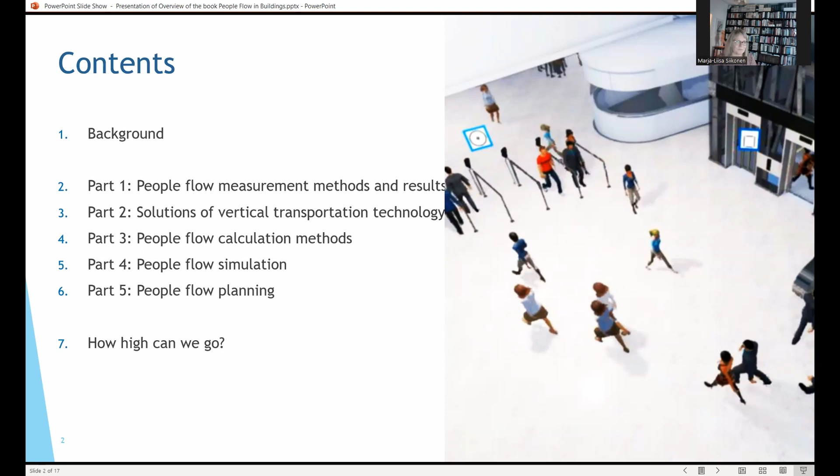In 1970s, 80s, Barney dos Santos published the book of Elevator Traffic Analysis, Design and Control. It is the fundamental work in elevator traffic and has inspired me in my research work throughout the years. Later, when planning customer projects, Vertical Transportation by Strakosch has given a practical insight to the elevator planning. I have experienced the changeover from the relay controls to software-based systems from 1980s up to now. Also, elevator planning methods have developed during these years. This is all I wanted to write down to this new book.

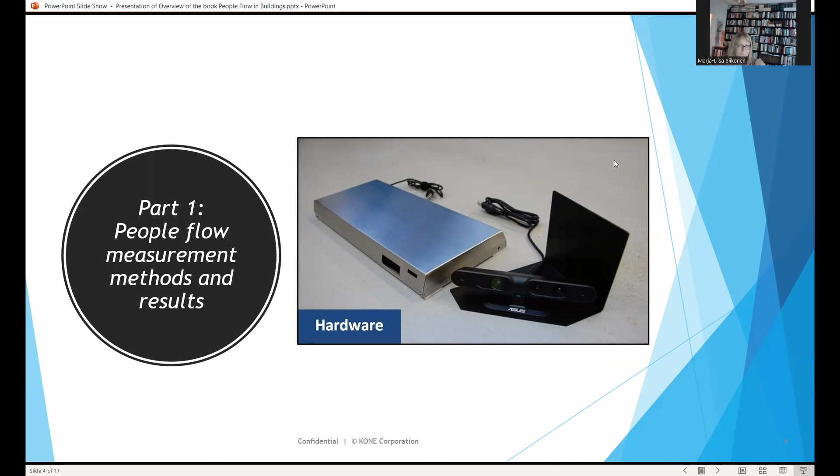Then to the highlights of each part of the book. The first part handles with people flow measurement methods and measurement results. One of the findings of the research was that people flow move in batches in buildings. The observed mean batch size varies between 1 and 2, depending on the building type and the traffic pattern. According to the observations, passenger batches arrive randomly to the elevator lobbies, following compound Poisson process.

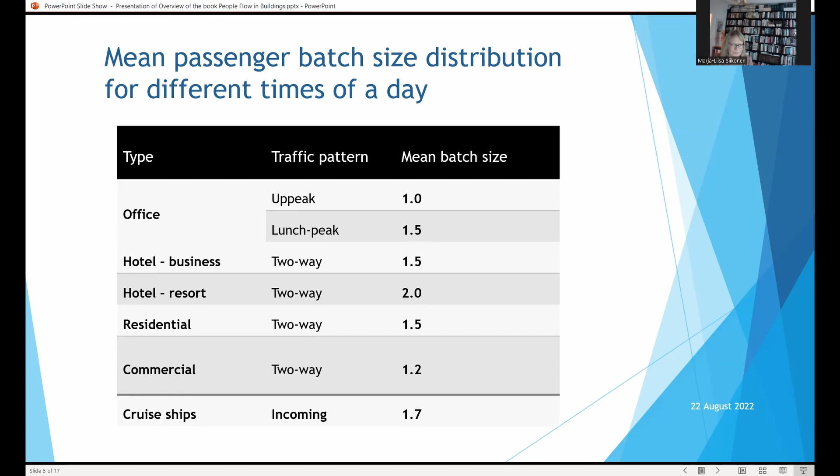In office uppeak, people usually arrive individually, where the batch size is 1, but during lunch hour, the batch size can be 1.5, according to the observations. In resort hotels, the batch size can be even 2. The second part of the book handles with solutions and vertical transportation technology of the current and future and past solutions.

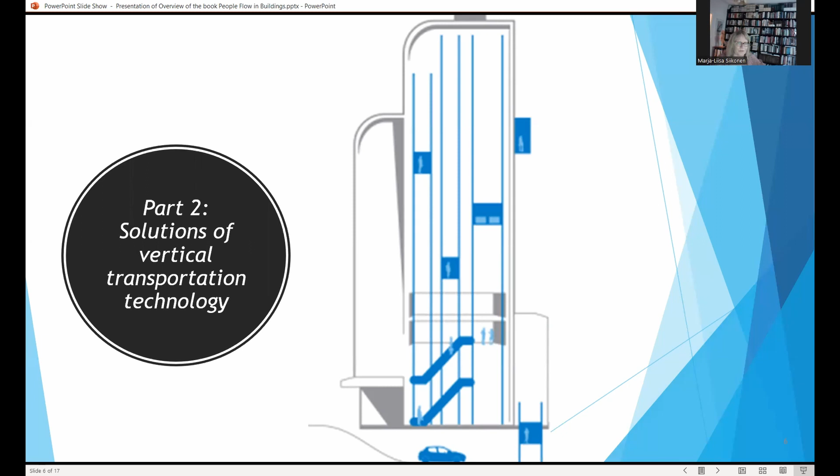One of the suggested early multi-car solutions was Odyssey, which was introduced by Otis in 1990s. Their elevator cabs move around the building using combination of elevator shafts and automated people mover. For short horizontal distances, the linear induction motor control moved the cabs smoothly on and off the elevator frame. It never became a product.

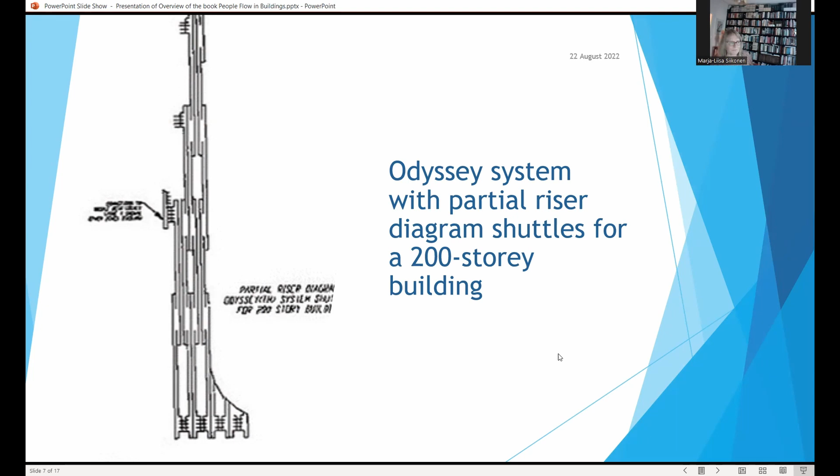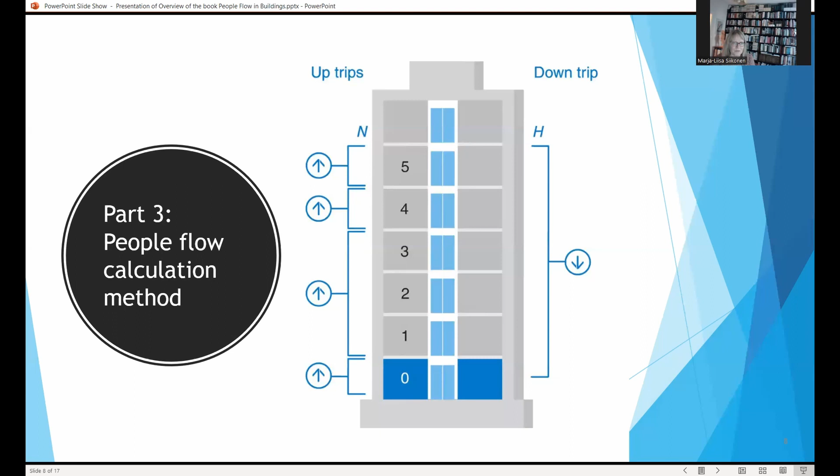There is a capacity density in persons per square meter, after which if the density increases, then there will be congestion, and finally the traffic is jammed if the density is high enough. This kind of phenomenon we can see in walkways, corridors, and staircases, for example.

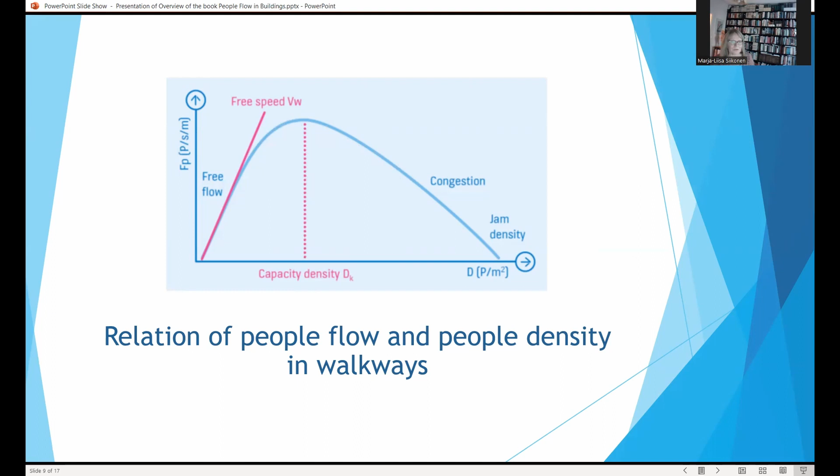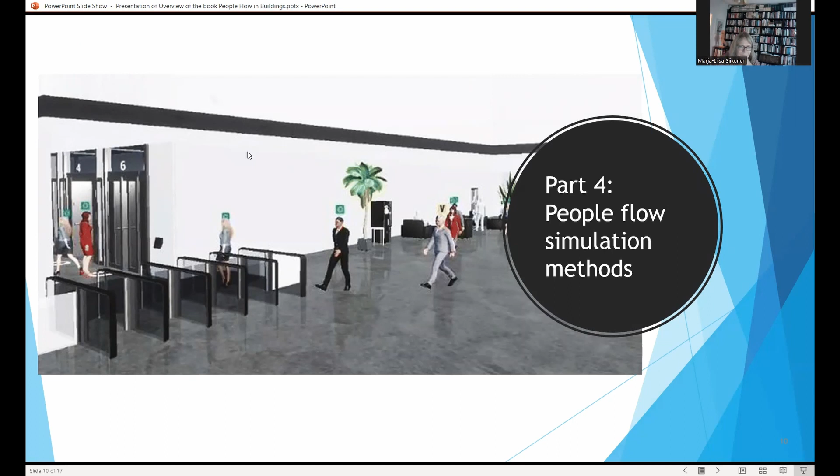The calculation formulas can be verified with simulation. Part 4 concentrates on the simulation methods. One example in the book shows the simulated round trip time for the 3 traffic patterns: up peak, lunchtime, and down peak. The round trip time is the longest for the lunchtime traffic because there are stops in both directions. Round trip times are the shortest for the down peak.

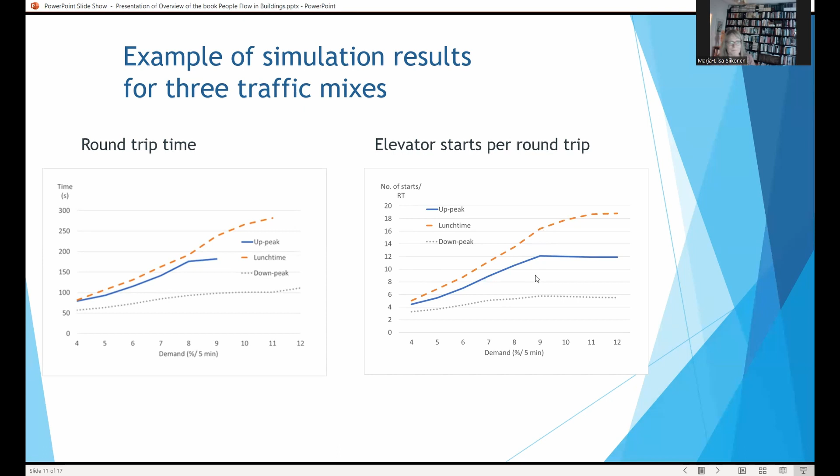Similar effect can be seen for the number of stops per round trip. At certain point, the number of stops per round trip starts to saturate, and this depends on the cabin size of the elevators, and also on the number of served floors. Perhaps other things also.

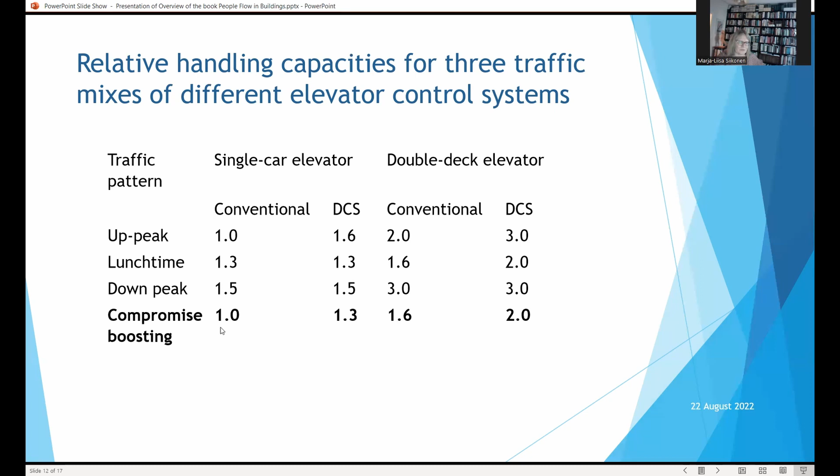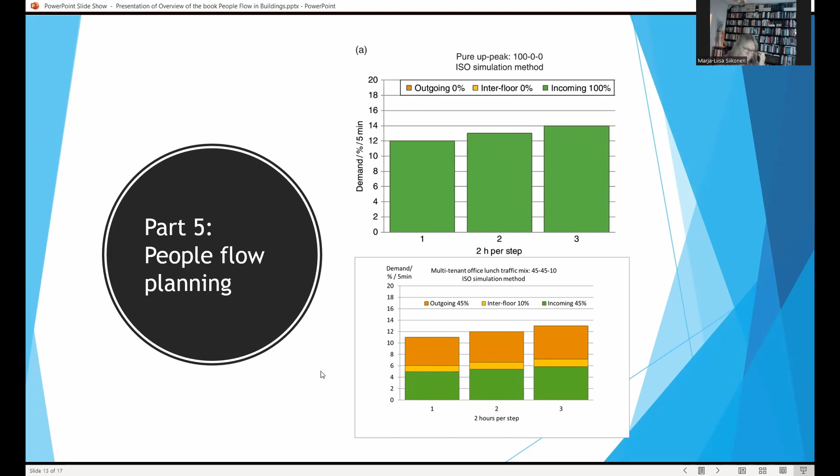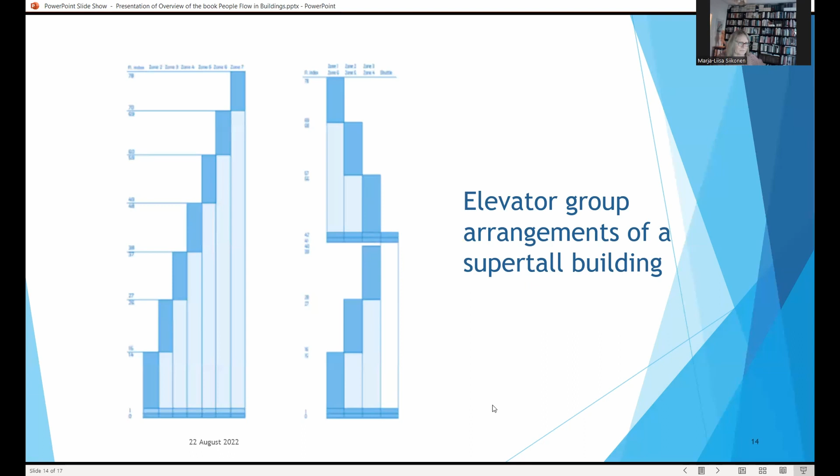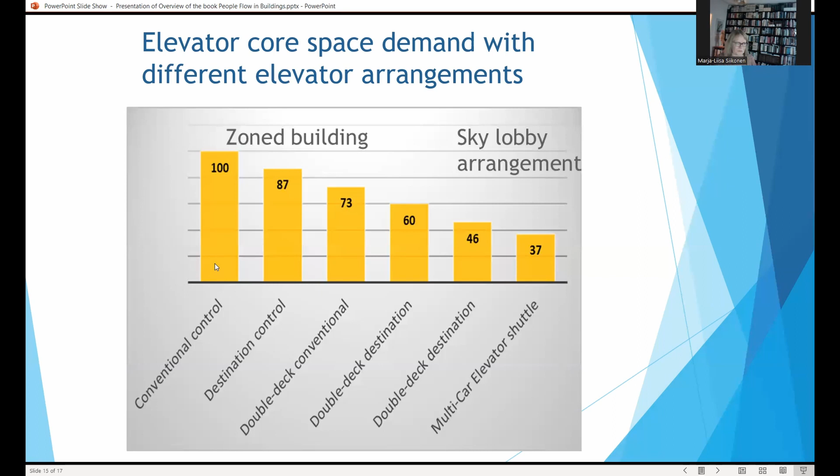Up to now, the limiting factor for tall buildings has been the weight of the ropes, which increases with the travel height. Also, the speed of the elevators has been a problem because it becomes harmful for the human ears when it exceeds 8 meters per second. Ropeless technology can avoid these problems, since in a multi-car system with linear motor there are no ropes, and the elevators do not require high speeds. The handling capacity and waiting times can be adjusted by adding the number of cabins in the shaft.

With the last analyzed arrangement, where double decks with destination control served the local groups and a multi-system was used in the shuttle groups, someday Frank Lloyd Wright's dream of the mile-high building can be reached.